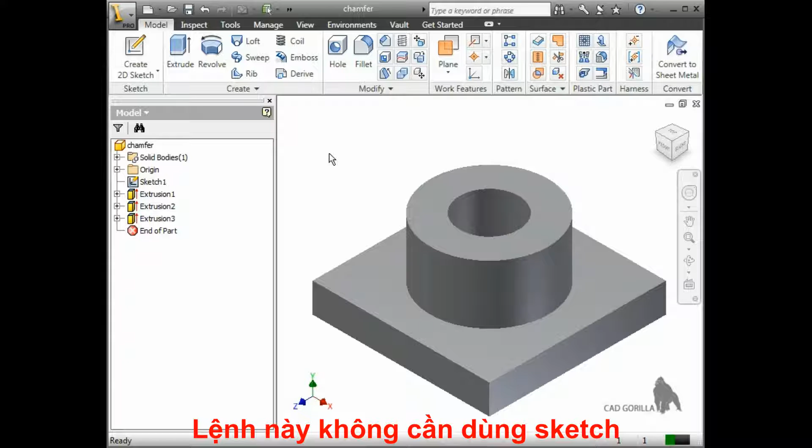The chamfer command is also a placed feature, so you can use it without first creating a sketch. It can be launched using the chamfer icon. There are 3 different options for creating chamfers. They can be defined by a single distance, a distance and an angle, or by 2 distances.

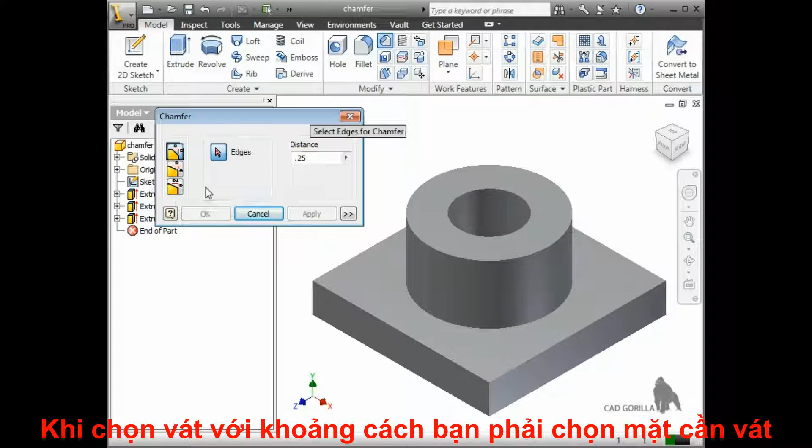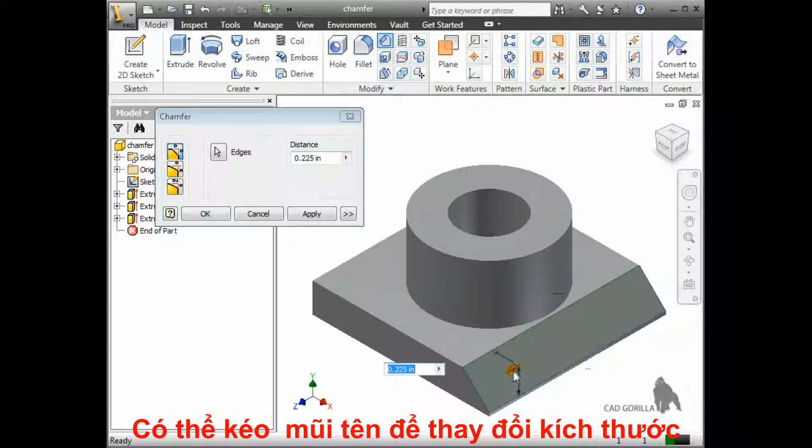When using the distance method, you simply select an edge or edges you would like to chamfer, then specify a distance. Only a single distance is needed because Inventor will automatically break the edge at a 45-degree angle, cutting the same amount off on both sides of the edge. You can also click and drag the arrow in the design window to change the distance graphically.

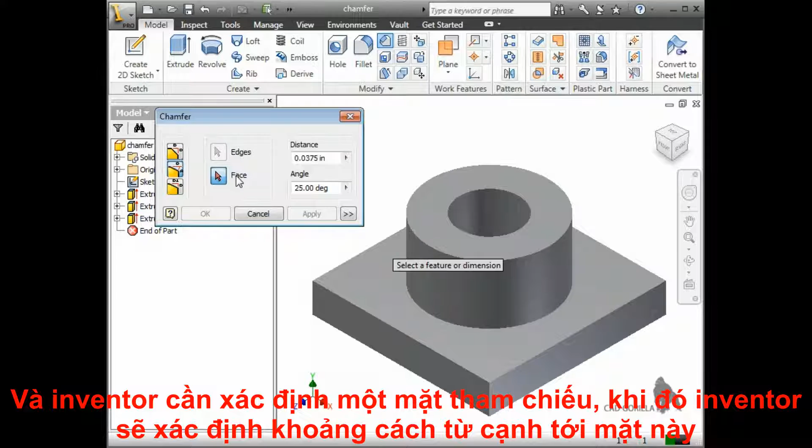If you want the chamfer to have different cut depths on both sides of the edge, you can use either the distance and angle or the 2 distance options. I'll select the distance and angle option, and you can see that I need to select both a face and an edge. I need to select a face to use as a reference. That way, Inventor knows to measure the distance and angle on this face from the selected edge.

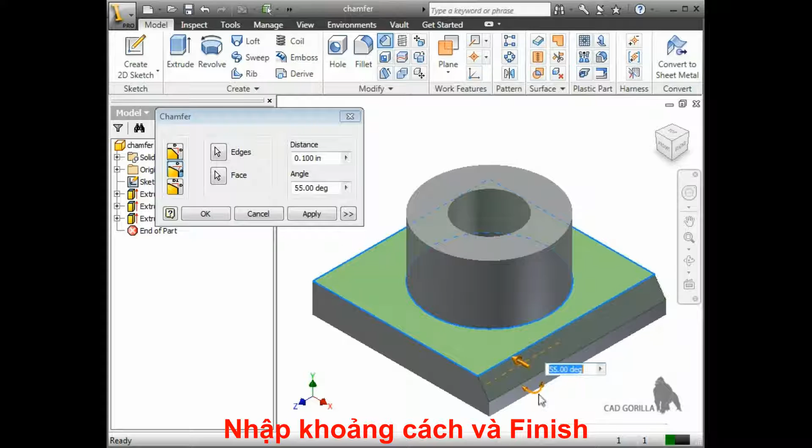Again, you can use the arrow to graphically change the distance, but there is now another arrow that you can use to change the angle. With everything specified, I'll click Apply to finish the chamfer.

Finally, you can use the 2 distances option to define a chamfer. When I select an edge, I can input 2 different values for the distance of chamfer. If the distances are applied in the wrong direction, I can use this button to flip them.

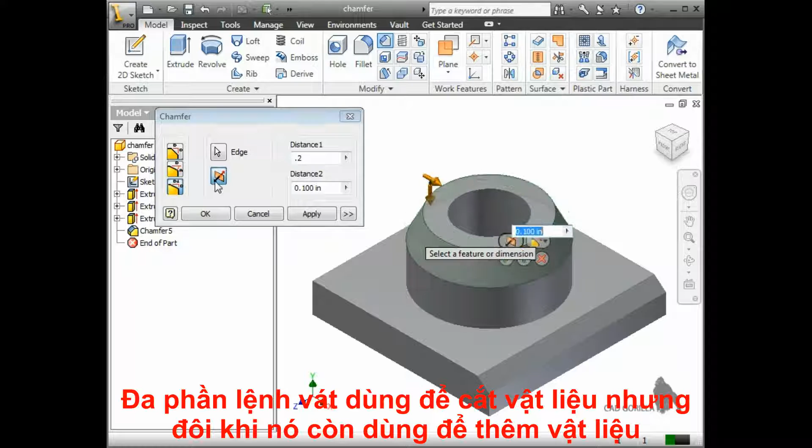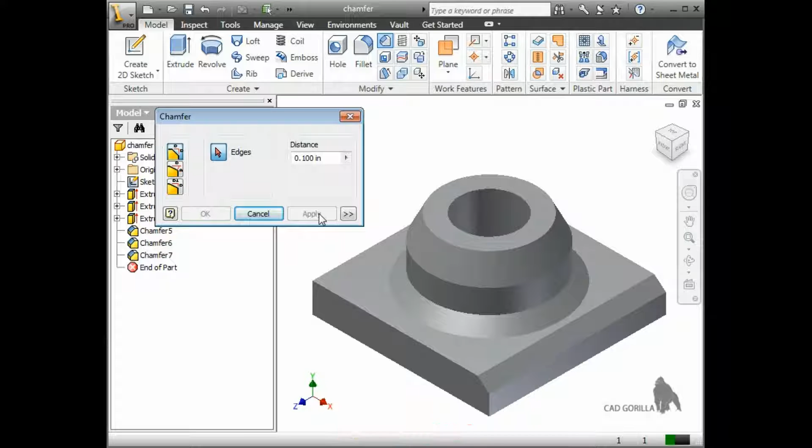Although chamfers are most commonly used to break edges by removing material, they can also be used to add material. I'll reselect the icon, and when I select this edge, you can see from the preview that material will be added to create the chamfer. I'll click Apply, and you can see the chamfer has been created. Like many other features, the chamfer dialog box remains active, so I can continue quickly adding more features.

There is one last setting that is good to know when using chamfers. I'll use the single distance option and select the 3 edges that make up this corner. When chamfering corners, you have the option to create a setback, having the edges join at a flat intersection. I'll expand the dialog box, and I can see the setback option here. If I select No Setback, the chamfer will form a corner point.

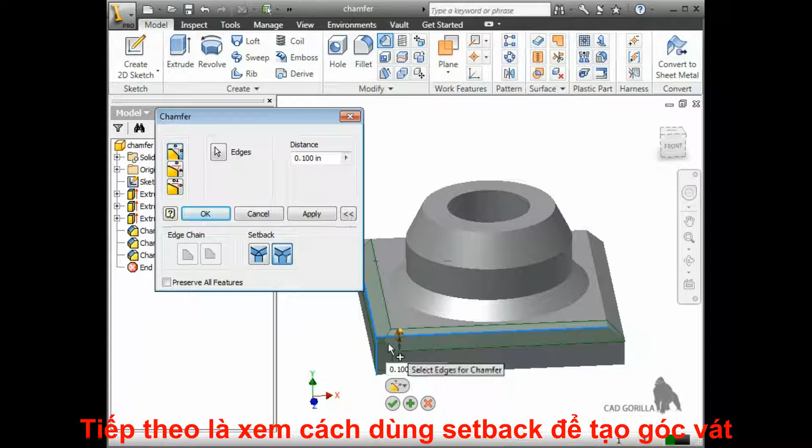When the preview looks the way I want it, I'll click OK to add the chamfer and close the dialog box. When I do, the chamfers are added, and you can see them listed in the browser.